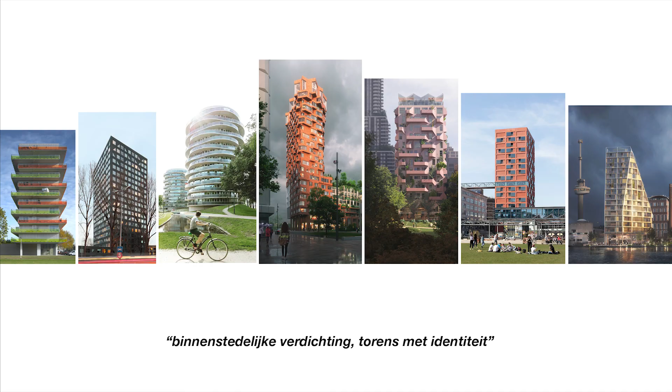The very first project I ever did was a multi-story bicycle parking facility in Amsterdam. I've done bicycle parking facilities, but I've also designed the VVIP terminal at Schiphol and many other buildings. In the last few years, we've been really busy building housing projects, social housing projects.

Here in Eindhoven, you probably know the project Haasje Over, and this was one of the projects that we did in my office. We also work globally and internationally, and at the moment we're very busy in the Middle East and in West Africa.

As a supervisor, I've been a supervisor for the last 15 years. I do a lot of supervision in Amsterdam, and I'm also the supervisor or bouwmeester of Schiphol.

Many people ask, what does a supervisor do? Basically, this is what I do. I won't read it all to you, but basically I guide the design process of the building, urban planning, and the architecture. And then I pass it over to the Welstand or the CRK, and there is a kind of cross-check.

Why I wanted to be a supervisor was because I really believe in the city and how we make our cities. I believe that cities make people more civilized, and we behave better when we live in cities. And what I'm interested in is what is happening in the Netherlands for the last 50 years, but particularly the last 20 years, and why we have a situation that we have today with the nitrogen crisis.

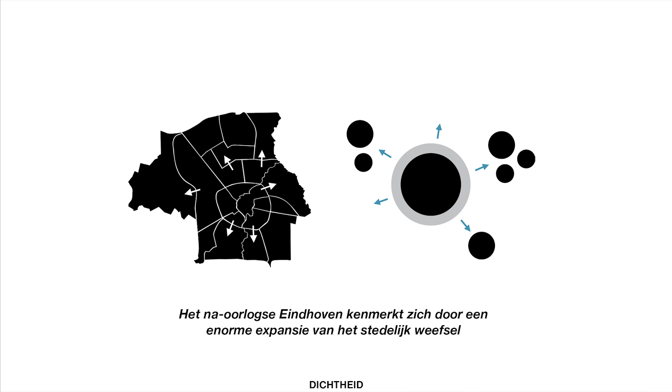What we've been doing, the old idea of building out, we have to build in. We have to inbreid - this is a technical word we use all the time. Some people ask what inbreiding means, but actually inbreiding is building inside.

Some people fear the big city, saying there are big problems. Yes, there are huge problems in big cities, but there are huge solutions. Big cities are more innovative, they use fewer resources, and this has been proven. It's almost like the elephant compared to the mouse - the elephant is far more efficient.

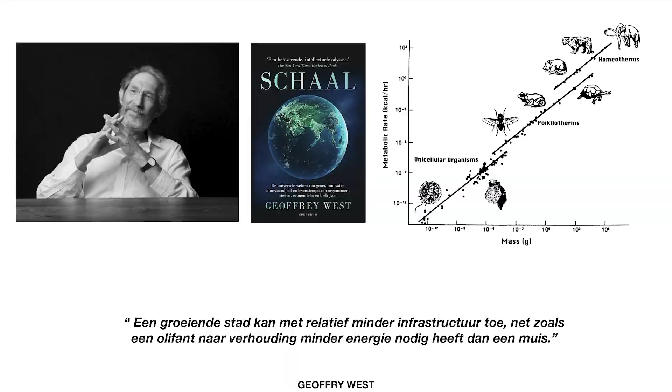So we have to think about how we can accommodate more people in the city. Also, the cities that we love are cities full of people. So we need to densify, we need to inbreid, and we need to make it nature-inclusive - we have to bring more nature into the cities, because that creates a feeling of well-being and makes density much more acceptable.

We also need to think about program, the voorzieningen, and we need to think about the menselijke maat, the human scale. So when you're dealing with a tower, you have to think about what we call in our jargon the Eindhovense laag - that human scale, the menselijke maat.

And we have to create more green and more open public space, openbare ruimte. We're starting, under me as a supervisor, with the Stadhuisplein. We'll start there and move out to the rest of the city.

There are wonderful pieces of architecture and urban planning in Eindhoven. As somebody who's not from Eindhoven, I've seen really beautiful things. But we have to find more of a bindmiddel to join them together and bring them together.

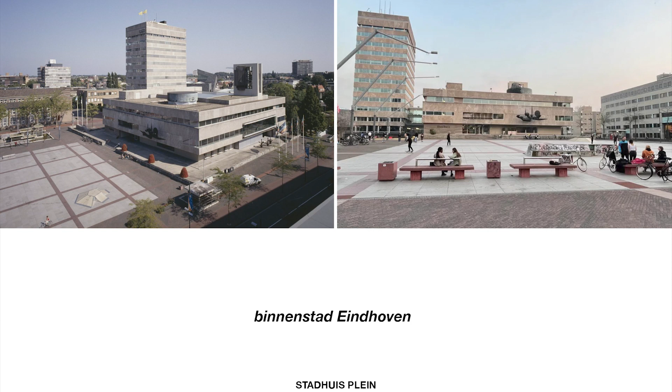If you look at the Stadhuisplein, it is a very beautiful plein, I've been told. I'm not going to criticize it, Ronald, but it needs more green, it needs more definition. We need to define the plein more.

So we're going to start with defining this square. These buildings that we're going to build here are the supporting act for the plein. The hoofdspeler in Eindhoven will be the Stadhuisplein, and the buildings are the supporting act.

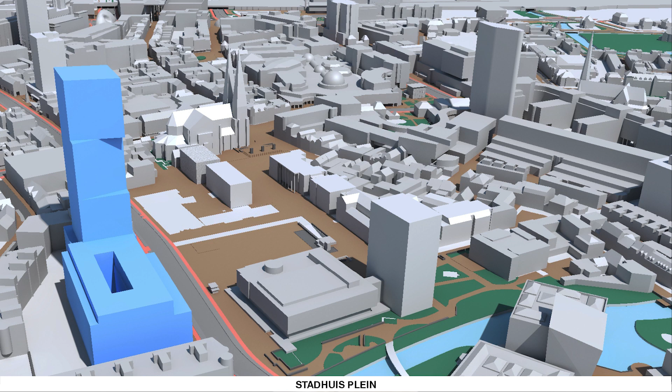We start with the first building - this is the Stadhuis, an existing building, the old Stadhuis I believe. We're going to add an extra floor here and a tower here.

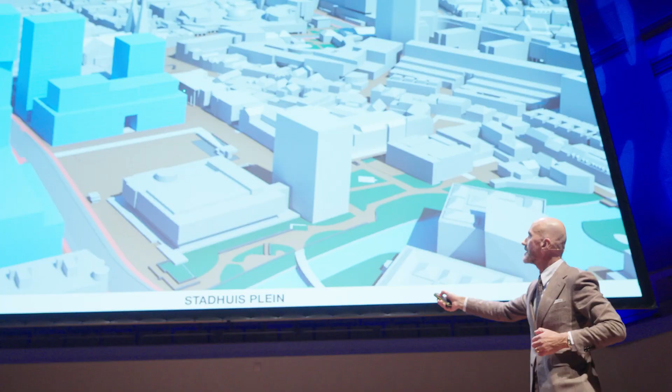Then we're going across the Stadhuisplein. Many of you know that this is now already demolished. We're going to build a building here and some buildings behind.

Then we're going over here, another building, and we're going to define the Begijnenhof and define this plein. Then we'll build a building here, and finally the idea is the building there.

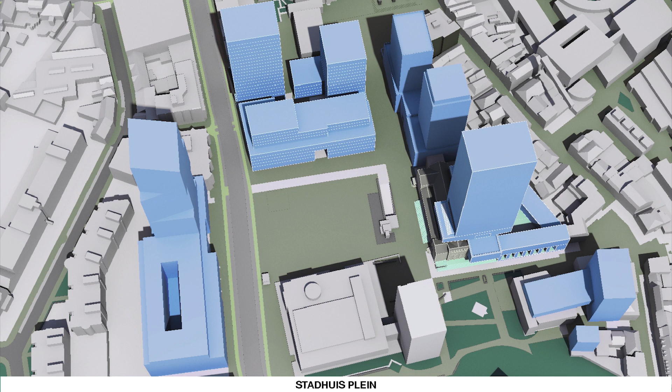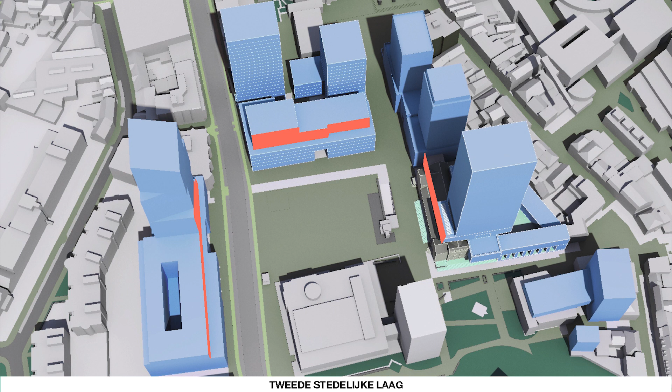It is about creating a plein, the Stadhuisplein. So we want to define the plein, and then build the walls around it, the architecture that makes the plein, and we want to add-

On the top here, we call it the Belvedere level. That is extending the plein, making it more three-dimensional, so that when we have public events, people can be up there and the plein gets even bigger.

It gets more spacious. This is the square, the plein, where people in Eindhoven will celebrate, they will protest, they will party, and they will cry. When there's a big loss or something sad, this is also the plein that will be used.

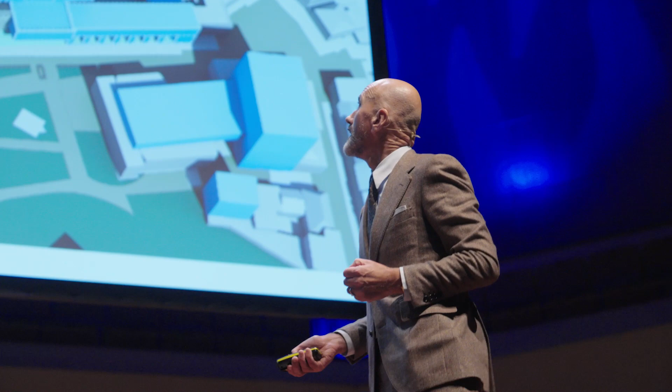So this will be seen from - this is the Stadhuis. So we're defining the plein, and the buildings around it will be defining the plein.

So when you come into the city and somebody says, where is Stadhuisplein? You see that group of buildings there? That's where the Stadhuisplein is. You go to the Stadhuisplein, and then in the plein, you have that more human scale.